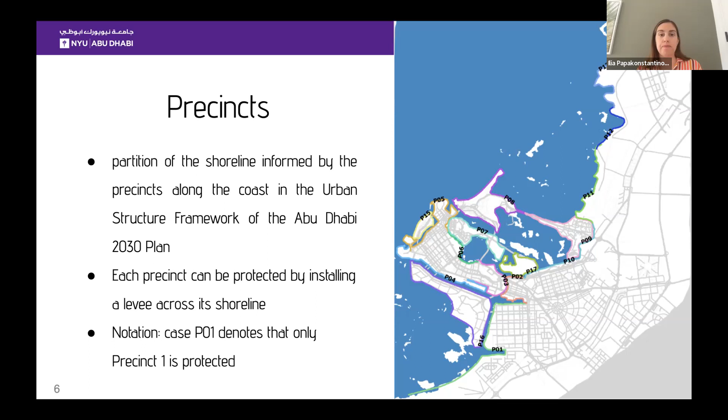For notation purposes, P01 or P02 means what is protected. These combinations are protected. Now, let's see the process in a schematic. As I said, first we do the hydrodynamic simulations. This is done by Dr. Cho, who is specialized in hydrology.

And then we take these results and we find what are the areas that are flooded from the sea level rise. And these floods will cause closure of some links and also isolation of some other links. So we remove all those links that are isolated or flooded, and we end up with a reduced network. For this reduced network, we do a new traffic assignment.

Now, the problem here is that we have 17 precincts to protect. So, in fact, if we want to see all the combinations, it's 2 to the power 17. It's a very high number. So that's why we explored several cases, starting from protecting only one precinct, and then we were adding according to what was more interesting. Our aim is to find the best combinations in terms of congestion levels, so the minimum congestion level.

So the first part is the hydrodynamics model. I'll talk a little bit about it, but more information will be in this paper that is published by my colleague, Dr. Cho. So what he does is he explores 3 different models and then combines them. The first is the tidal water levels, the second is the storm surge, and the third is the wave run-up. So the summation of all this will give us the sea level rise in different parts of the Gulf.

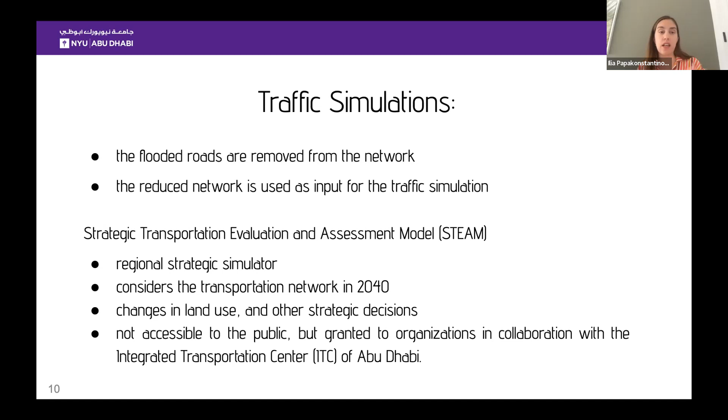The metrics that we use: we have 2 categories. We want to quantify mobility and accessibility. For mobility, we use the VHT, the VKT, and the VHT per vehicle. These are to capture the network-wide situation. And then also we see maps with VC ratio, which we can use to see what happens in individual streets.

Now, for accessibility, we use the number of vehicles, because it happens a lot that the VHTs and the VKTs are low because actually no cars go on the road, because the trips cannot be realized. So this is a measure of accessibility. If the number of vehicles is very low, it shows that they cannot really realize their trip. This can be either because there is no way or because the travel times are very, very high. And usually we use percentage changes instead of absolute numbers, using as base case the best case scenario, which is protect all precincts.

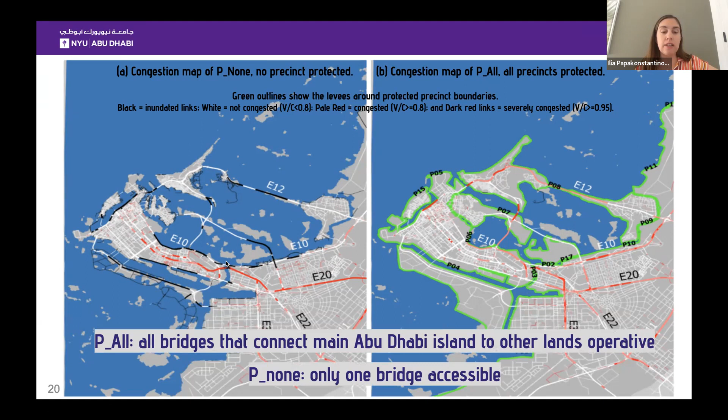So the pale red is a little bit of congestion, but the darker red parts are very, very congested. And the white means that there is no congestion. And the black is where there is flood. So the first thing is that in the protected case, all the bridges are operative here, but in the case of no protection, there is only one bridge, the Sheikh Zayed bridge, that is accessible. So this becomes a major bottleneck because it's the only route. That's why we have much more congestion here, this very red line compared to here.

Also, there is accessibility reduction. That's why the network, if you see, looks smaller in the case of no protection compared to the case of full protection. And the number of vehicles is approximately lower by 30%. So this 30% cannot realize their trips. Despite this, we notice that the total network VHT is higher by 20%. And this happens because of rerouting and congestion. So even though fewer people are out, they will reroute so much that the traffic will be 20% worse. VHT per vehicle also is much higher, 70% higher.

Now, obviously, P all is the best case scenario, but it's very expensive. P none is the least expensive, but of course the least effective. So we want to find strategies that are somehow the best in terms of accessibility and mobility, but not as expensive as P all. Here are the most interesting cases that we found. I will not show all of them because of time, but I will show the most important.

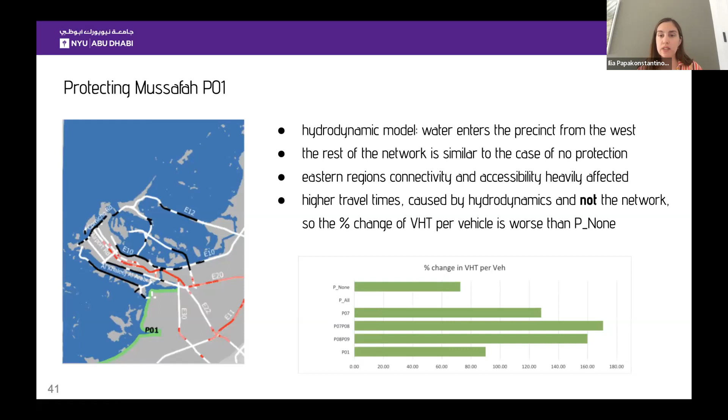Now, let's move to the west corridor. Here, I will talk about the first precinct to protect. The hydrodynamic model here shows that even though we protect the precinct, there is flooding from the west. And so the situation is bad, not because of the network effects, but because of the hydrodynamics. The rest of the network is very similar to the case of no protection. The connectivity is bad, as you can see, and the travel times are very high.

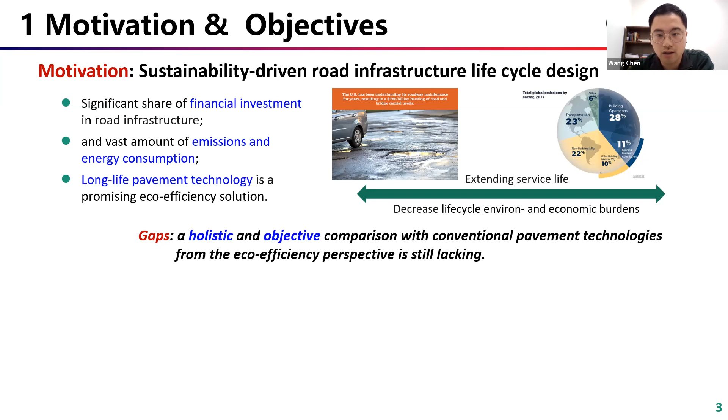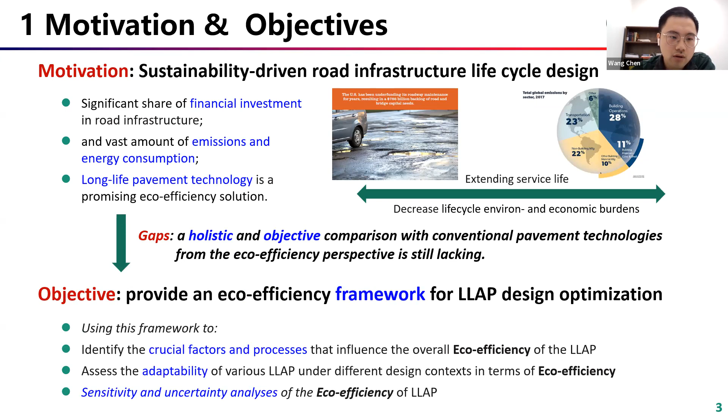So, given sustainable development and climate change impacts in the pavement field, long-life technology is a promising eco-efficiency solution to respond to such issues. However, a holistic and objective comparison with conventional pavement technologies from the eco-efficiency perspective is still lacking. Motivated by this gap, our objective is to provide an eco-efficiency framework for long-life asphalt pavement design optimization. We hope to use this framework to identify the crucial factors and processes that influence eco-efficiency and assess the adaptability of various alternatives in different design contexts through a comprehensive sensitivity and uncertainty analysis.

So first, I'd like to introduce the pavement design. Based on research and practice in China, we selected the five most promising long-life asphalt pavement structures and compared them with a conventional design. So there are six structural designs here: the full depth asphalt pavement, thick asphalt layer asphalt pavement, inverted, enhanced semi-rigid base, composite, and the traditional semi-rigid base pavement structure. The last one is set as the benchmarking design.

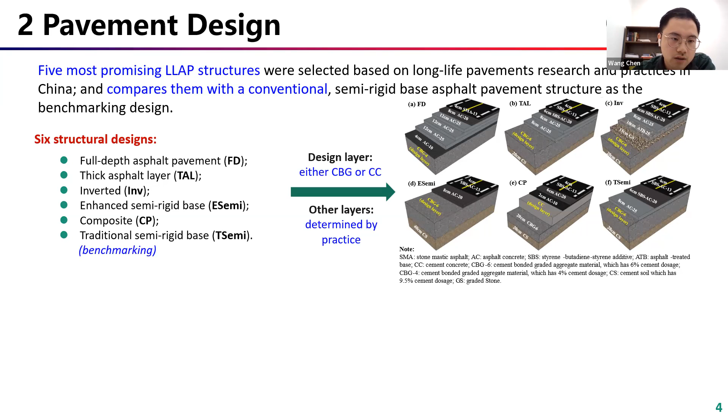As to the pavement design, we consider typical design parameters. The most important one is the design service life, that is 40 years, and some other traffic demand analysis parameters. The design principle here is equivalent failure. That is, each alternative can achieve the same service performance within the same design service life. So the structure and thickness design were conducted based on the highway asphalt pavement design specification.

After that, we use the standard process-based life cycle assessment approach to conduct the life cycle environmental impacts and life cycle cost analysis. We consider here a 5-stage typical procedure, including material extraction, production, transportation, construction, as well as the end of life process. The maintenance phase wasn't considered here because we don't have any theoretical deterioration model or practice history data.

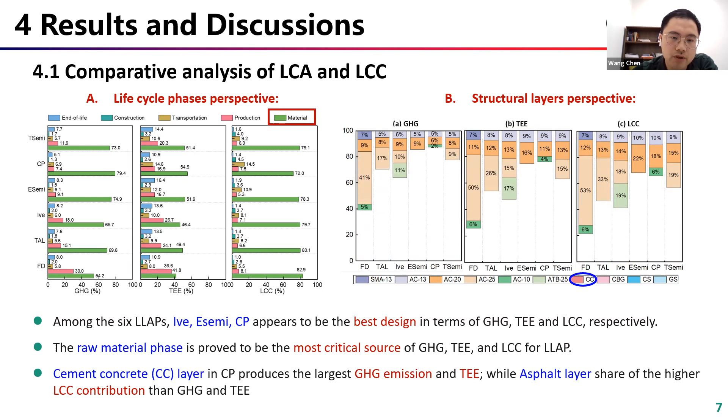And from the perspective of the structural layers, the cement concrete layer in the composite alternatives produces the largest greenhouse gas emission and total energy consumption, while the asphalt layer shares the higher life cycle cost than greenhouse gas emission and total energy consumption. From the materials perspective, the cement material is a dominant factor for greenhouse gas emission because it accounts for about 50% to 90%. And the content of the asphalt layer, asphalt material and cement material involved in the long life asphalt pavement proves to be the key factor in generating the variabilities, such as the full depth and the composite pavement alternatives.

From that analysis, we can see when the design parameters change, the thickness of the design layers will also change, and the same for the greenhouse gas emission, total energy consumption and life cycle cost. So based on the baseline design scenario, we investigate how the 3 life cycle performance indicators respond under various variations in the design parameters. So we investigate 4 critical design parameters here, including the traffic growth rate, the initial traffic volume, the design life and the subgrade resilient modulus, and listed are their variation ranges.

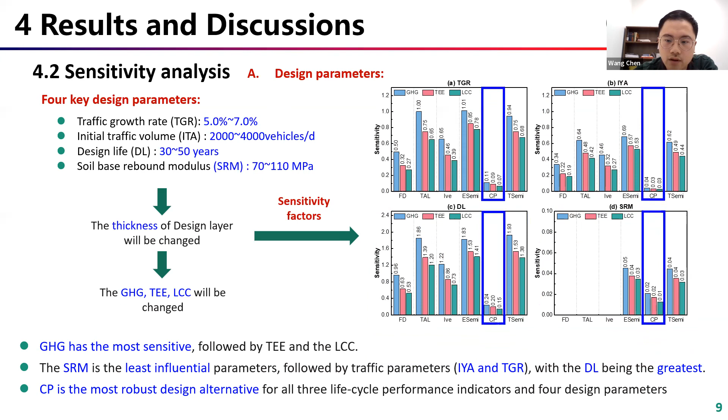Another sensitivity analysis considers the life cycle inventory data, such as the material price, the emission factors and energy consumption factors. We selected 24 relevant life cycle inventory factors, and each factor was decreased by 10% to get the sensitivity factors metric. From the results, we can find some interesting findings.

We can see life cycle cost is more sensitive to the price of the asphalt and the aggregates. While in terms of greenhouse gas emission and total energy consumption, the most sensitive parameters are the life cycle inventory data of the cement and the diesel. We can also see the composite alternative had the most sensitivity, in red, to the life cycle inventory data of the cement.

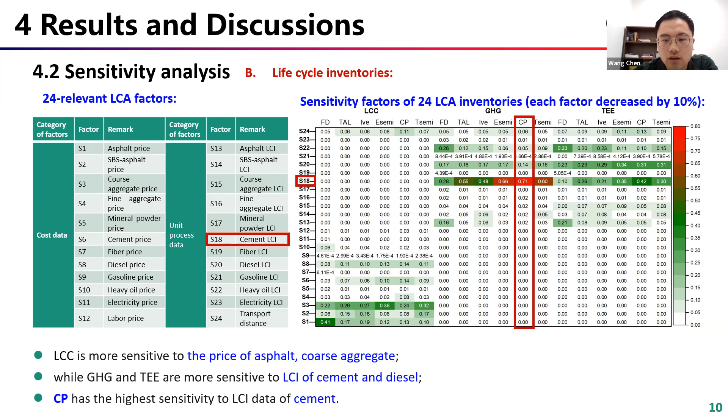The previous discussion presented comprehensive comparisons between the individual alternatives. To comprehensively evaluate the adaptability of various alternatives under different design contexts, we selected 3 levels from the previous design scenario: the extreme best condition, the middle one is compromise conditions, and the last one is the worst. For example, the best condition means an excellent service environment, and in contrast, the worst means a very harsh service environment.

From the results, as to the shaded area, we can see in most cases the enhanced semi-rigid and the inverted alternative can be considered the most eco-efficient solutions. When we consider a higher design life, for example 50 years, we can see the composite alternative dominates the enhanced semi-rigid base alternative to be the more eco-efficient solution.

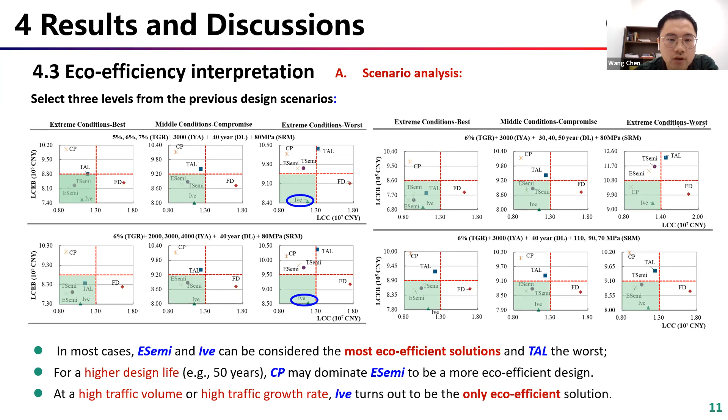Unlike the design parameters, in terms of the life cycle inventories, we assess the adaptability of long life asphalt pavement from the uncertainty perspective. We selected the unit price, energy consumption, greenhouse gas emission factors, and the transportation distance, with an error range of 5% for life cycle inventory data and 50% for transportation distance, to assess the uncertainty.

From the above analysis, the framework proposed in this study provides a comprehensive analysis of eco-efficiency in terms of long life asphalt pavement design, and the results showed that the design and comparison of long life asphalt pavement need to consider the economic and environmental burden. The preceding analysis has the following three policy implications.

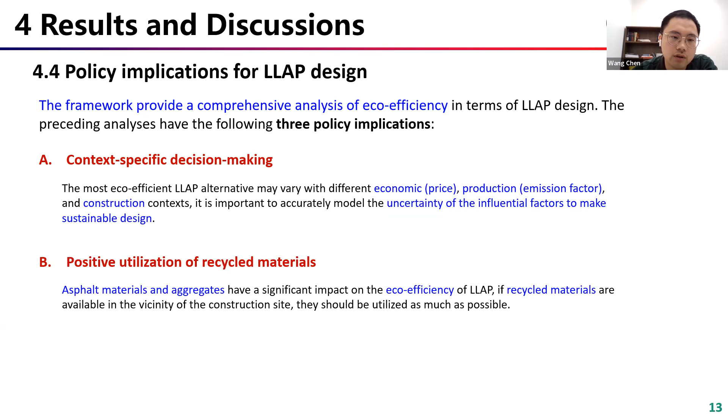The second one is positive utilization of recycled materials. From the sensitivity analysis, we can see the asphalt materials and aggregates have a significant impact on the eco-efficiency ranking. So if recycled materials are available near the construction sites, we suggest they should be utilized as much as possible.

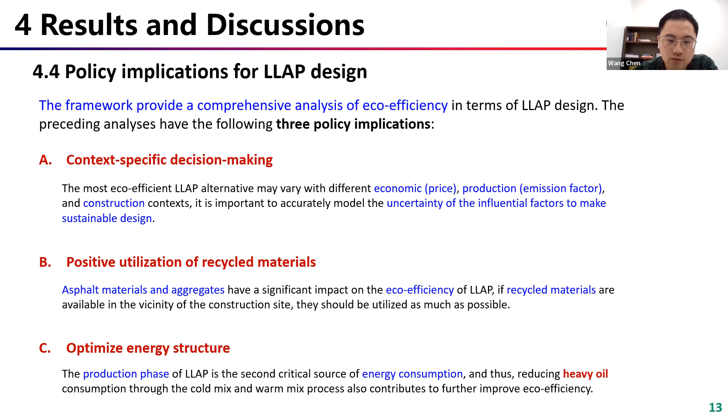The last one is to optimize the energy structure. We find the production phase of the long life asphalt pavement is the second critical source of energy consumption. So if we use a cold mix or warm mix process to produce the asphalt mixture, that can reduce heavy oil consumption in the life cycle to further improve the eco-efficiency.

Future research can be conducted in at least two aspects. The first is to broaden the scope of eco-efficiency to cover the pavement operation stage, for example layer-by-layer maintenance strategies based on a mechanistic deterioration model. The second important aspect is to incorporate deep uncertainties into eco-efficiency assessment.

For example, recycled material and polymer modified material contents, because with sustainable materials development, we can use more recycled material or advanced asphalt material to enhance the performance of the pavement structure. The second is the intelligent construction utilization proportion. And the final is the clean energy transportation vehicle market share.

As to clean energy transportation vehicles, clean vehicles will influence the life cycle environmental impacts in the operation stage. So scenarios or sensitivity analysis need to be considered here in a future study.

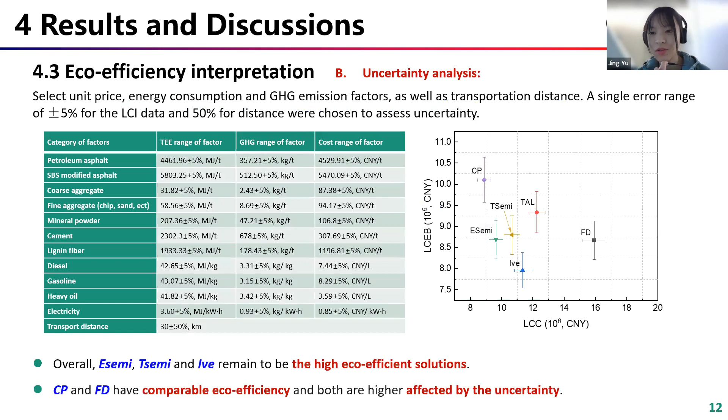Hi. Hello, I have a question, Dr. Yu. Okay. So can we go back to the pages where you calculate the environmental cost with the coefficients alpha and beta? Just a clarification, you mean this page? I think that's the next page, maybe. Or this one? Yeah, this one.

Okay. I have seen that you calculate the life cycle environmental burden by the coefficients alpha and beta. And I wonder, is it an empirical coefficient, or do you have some model to capture the social willingness to pay, something like that? Yes, we use empirical coefficients because this is a citation from 2005.

If we want, the method can provide a very helpful framework to conduct a sensitivity analysis of the coefficients, different coefficients. But here we just use fixed coefficients to form the life cycle environmental burden. Okay, thank you.

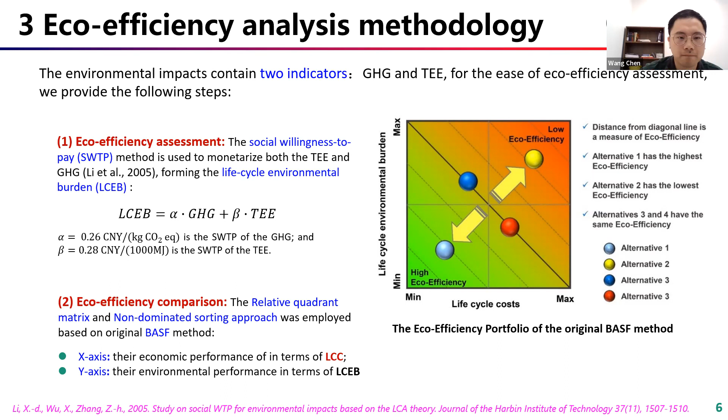And I have another question. When you're comparing the environmental burden or environmental cost between the alternatives, have you considered the difference in maintenance strategies between those materials? I think you mentioned our future task, because actually we didn't consider the maintenance stage, since we don't have any practical history data or a theoretical deterioration model.

For long-life asphalt pavement design in China, we could use the MEPDG software to model deterioration, but your question is very interesting because different layers or different materials have different service performance. So actually we need to consider the maintenance strategy layer by layer. This is our future task to address these issues. Thank you.

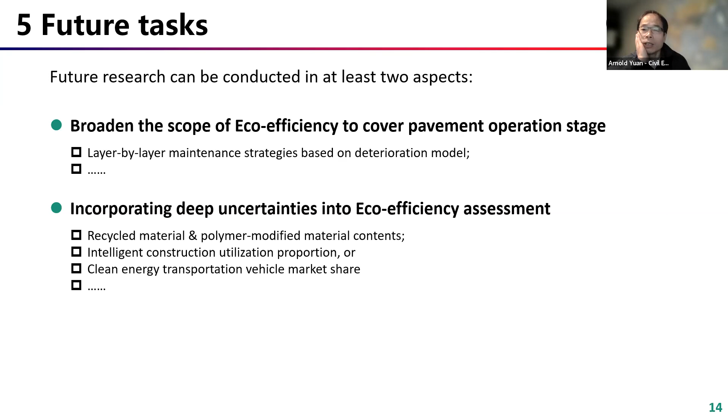May I just add one comment here? First of all, thank you for the question. Regarding the operation stage, as Dr. Chen has explained, at this moment we didn't explicitly consider the operation stage, but as he also explained earlier, all these 6 design alternatives were designed for the same service life. So that can ease the assumption a little bit,

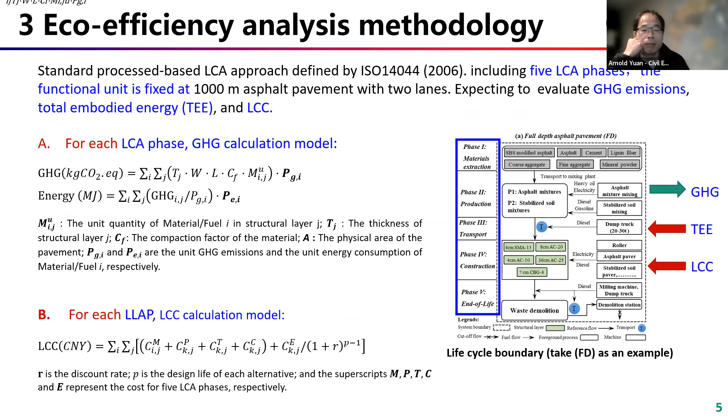but we do respect that even with the same design life, the deterioration path can be very different, and the maintenance strategy over the next 40, 50 years of the design life can be very different. That's definitely a weak point that we plan to address, hopefully using a mechanistic-empirical approach. Okay, thank you.

I think that was tied to my question, whether the design life was exogenous, and you just said the constraint is that the service life for each of the designs is the same. I was going to ask if each of the designs was somehow optimized for either of the criteria, but essentially the critical design objective was to have equal service lives. It's a nice study.

My understanding is that we didn't consider the optimized design yet. It's more a target-reaching kind of design. As long as we reach the critical criteria for those components, we are fine with that. May I add some comments? The professor's question is also very interesting, because in this paper we just consider 6 structural designs under the same design service life. So this is our basic assumption.